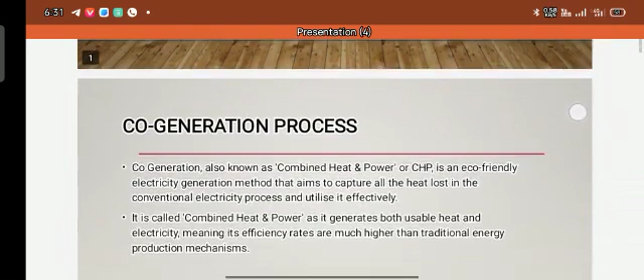I am teaching you in this period, demonstrating or explaining cogeneration and trigeneration. First point, cogeneration process. This cogeneration process is also known as combined heat and power, or CHP.

It is an eco-friendly electricity generation method that aims to capture all the heat lost in the conventional electricity process and utilizes it effectively. Second, it is also called combined heat and power as it generates both usable heat and electricity, meaning its efficiency rates are much higher than traditional energy production mechanisms.

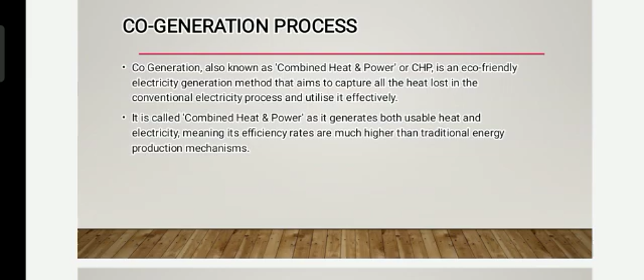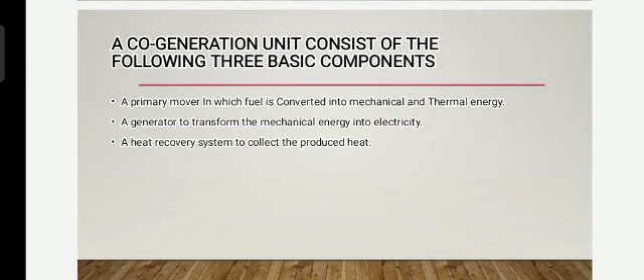A cogeneration unit consists of the following three basic components. The first component is a prime mover, in which fuel is converted into mechanical and thermal energy. The second one is a generator to transform the mechanical energy into electricity. The third one is a heat recovery system to collect the produced heat.

What is cogeneration? I will show what cogeneration is in this tree diagram. You can understand it.

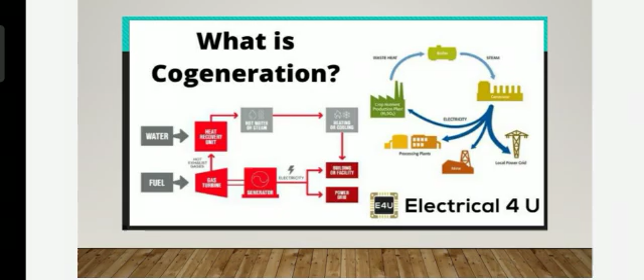Trigeneration process. Trigeneration is the production of combined cooling, heat, and power from a single generator or process. The trigeneration system produces electricity and useful heat, which is utilized for hot water, space heating, or steam production, as well as energy efficient cooling.

All fields of cogeneration application can be considered as a potential application of trigeneration when, in addition to electricity and heating demand, there is a need for cooling. For instance, trigeneration plants are commonly found in central heating and cooling systems for hospitals, hotels, and industrial plants.

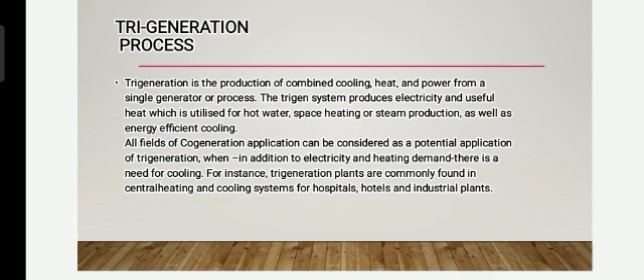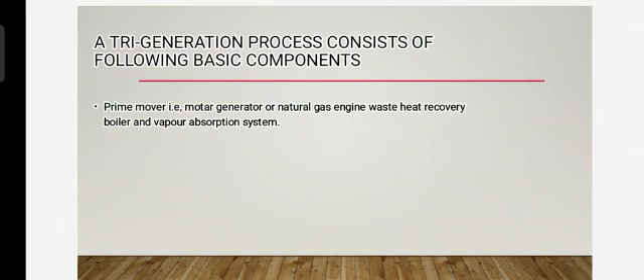A trigeneration process consists of the following basic components: a prime mover, that is a motor generator or natural gas engine, a waste heat recovery boiler, and a vapor absorption system.

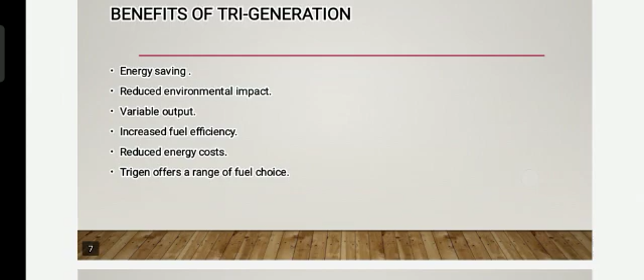Benefits of trigeneration: energy saving, reduced environmental impact, variable output, increased fuel efficiency, reduced energy cost. Trigeneration offers a range of fuel choices. When we give...